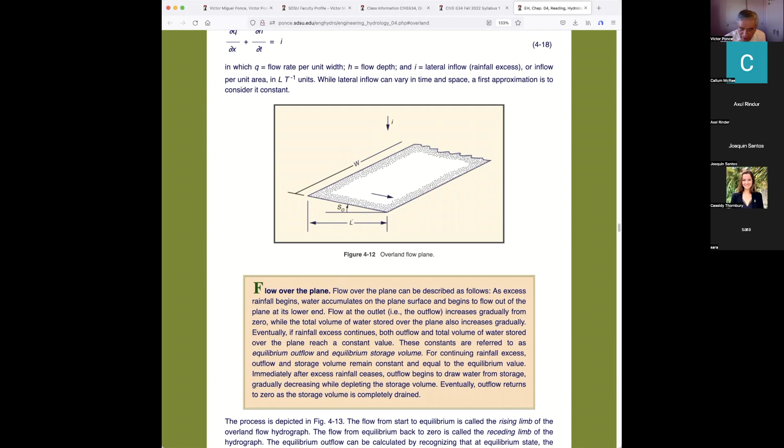Those of you that have taken computational hydraulics with me last year must know this subject already, hopefully very well. So flow over the plane, we have this characteristic which is very depictive of what's going on. We have the rainfall excess, and the response of the basin is a hydrograph because it starts from the beginning to respond. It doesn't wait until all the water gets through. When all the water is getting through the basin, it already reaches a peak over here. And then when the rainfall stops, then it starts receding.

So this is the volume of rainfall, and this is the volume of runoff or response. And as you can see, there's a phase toward the right because there has to be some time for the water to get from the furthest, most remote part of the watershed to the mouth.

There's different types of calculations for overland flow. The ones that are now being done have to do with numerical analysis. And this is part of the details of the HMS model, which I'm sure many of you have already heard of, if not already used. The Army Corps of Engineers HMS, Hydrologic Modeling System model, put out in the year 1998. So it's been 24 years since that model has been out.

That model was a successor to the HEC-1 model, which appeared in 1968. So 68 to 98, HEC-1, 98 to 2022, the HMS model. That's the standard for hydrologic calculations in the United States, and why not say it throughout the world? The Army Corps of Engineers models are used throughout the world. So for us to use these models, and we often have a chance to do that, we have to know something about overland flow, right? Otherwise, we would be blind.

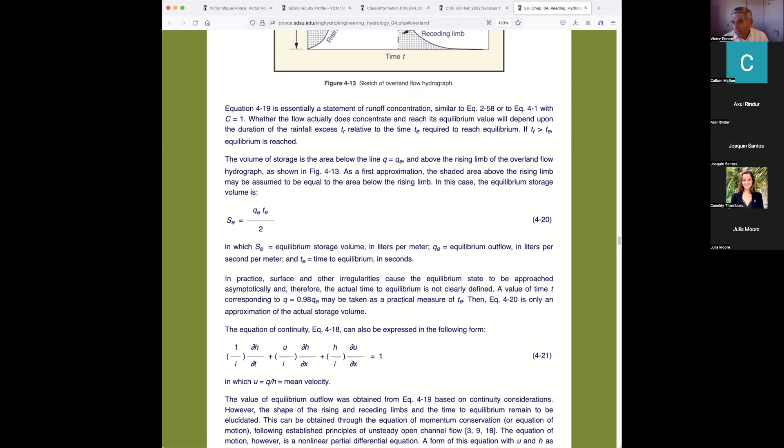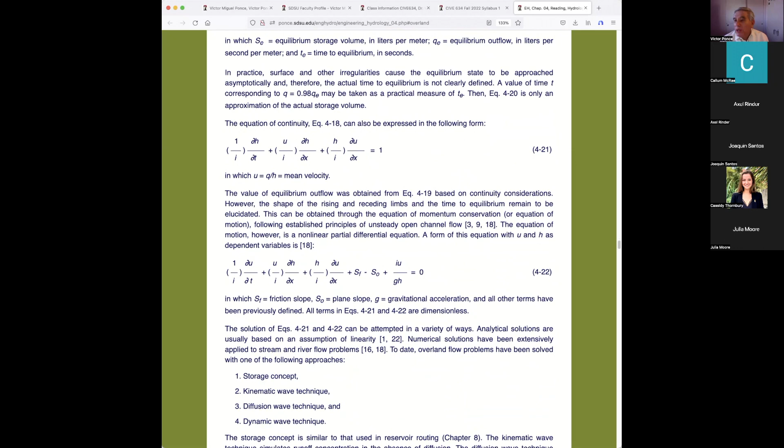So this is what I'm going to be talking about here today in the last 15 minutes, because that's all we've got. We've got the equations, equation of continuity and equation of motion. There's 3 ways or 4 ways to calculate the overland flow. The storage concept, which was pioneered by Horton in the 1930s, and then the kinematic, diffusion, and dynamic technique. The storage concept, I said Horton, 1935.

Kinematic wave technique, that was the technique that the gentleman in Australia, Wooding, as well as Woolhiser and Shockey of Princeton were using around the 1960s. At about the same time, at the end of the 1960s, Chow out of Illinois had one of his students do a PhD on dynamic wave technique. They actually did it. It's amazing, the dynamic wave technique.

And the reason will be apparent later on as I get into more detail as to why I'm a little bit chuckling here, saying they actually did the dynamic wave technique. They kind of jumped over from kinematic to dynamic without going to diffusion because they obviously didn't know. Then in 1986, I came out and did the diffusion wave technique for overland flow.

And then, of course, later on, everybody decided, and this is a story that I should tell, and I will eventually, of how the dynamic wave technique is unnecessary, totally unnecessary for overland flow. I'll get there. So diffusion wave technique turns out to be the best. And it's only circumstantial that your professor was the one at the center of developing the diffusion wave technique.

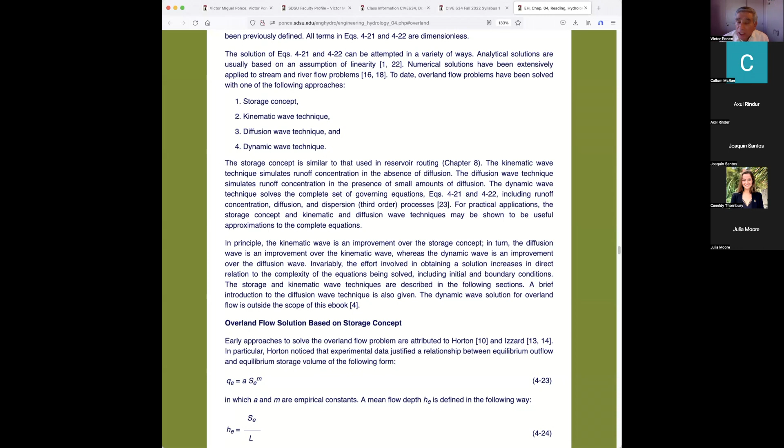I don't have the time in this course to look at all the details of how this happened, the advancement of numerical analysis and progress in that field, as well as the need to go beyond the kinematic wave technique into the diffusion wave technique. But first is, historically speaking, the storage concept. And the storage concept is due to Horton, like I said, in the 30s.

And this system, it's nice, and we did a paper in 1997, but it's kind of old. I think we should study it because it's part of history, and also it helps us to understand the process. But when it comes down to doing the calculation, the only thing we could do is use HMS, or use some other alternative model from other federal agencies, US agencies, or else European agencies. The Europeans have a model that they call SHE, like a woman.

But it's not called SHE because of a woman, but because SHE, for the French words Système Hydrologique Européen. I don't know French, so I can't pronounce it. But as the letters of the acronym stand for System Hydrologic European, the SHE model has been in the process of development and improvement for at least 30 years.

I can tell you stories about the SHE model, but I'm not going to do it at this point. We'll have to wait until later on if we have time.

So we have the time of concentration, and you would recall that I have already talked about time of concentration, and we have a formula here that came out from overland flow theory, which is very similar to the ones that have been developed by, for instance, Papadakis and Kazan. Papadakis and Kazan knew the theory, but they were not about to get into the theory. What they did was they collected a whole lot of data, then they correlated the data, and they came up with a formula that looks pretty much like this, in which they empirically define the value of M, which is the exponent of the discharge area rating.

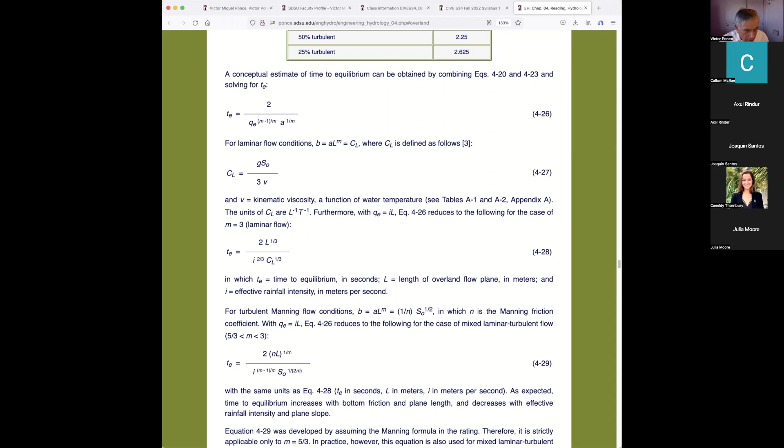And what about if it's in the middle? Most of the calculations, according to Horton, in the field were coming out with values of M equal 2. So that's how we represent the roughness or the regime of the surface flow. So as you can see, all this stuff is kind of in tune with what we have already said.

Another thing is what friction to use in overland flow, and the answer is we need to use a number which we call capital N that resembles Manning's n, but it is not Manning's n because it considers flow that is not turbulent but rather laminar, or rather in between turbulent and laminar. So for that purpose, we artificially jack up or increase lowercase n to be uppercase N, and as you can see, these numbers go all the way to 0.8.

And I did talk about this. We have some experience with this. One day I was in Florida with engineers from the Florida Water Management District, and they said they were using a Manning's n, or this capital N, of 1. And I said, boy, really, that's beyond my book. And they stood by their numbers. They said that's what it was. And I believe them because I had not done the calculation. I had no way of arguing with them on whether it was 0.8 or 1. It doesn't really matter because at that point, it could be either one or the other.

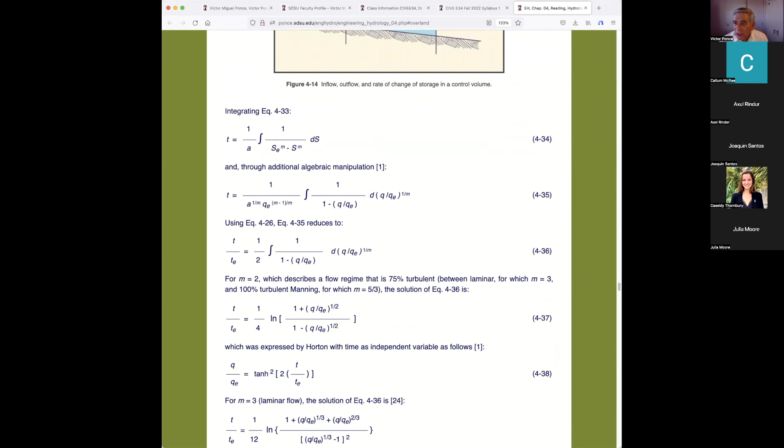So we have in here the integration that was done both by Horton as well as by Izzard. Izzard was a gentleman that was working in the 1930s and 40s in drainage of airports. And he also analyzed the equations of motion and came up with these formulas, which are fairly complex. And I'll come back later on to show this again in a more consistent fashion.

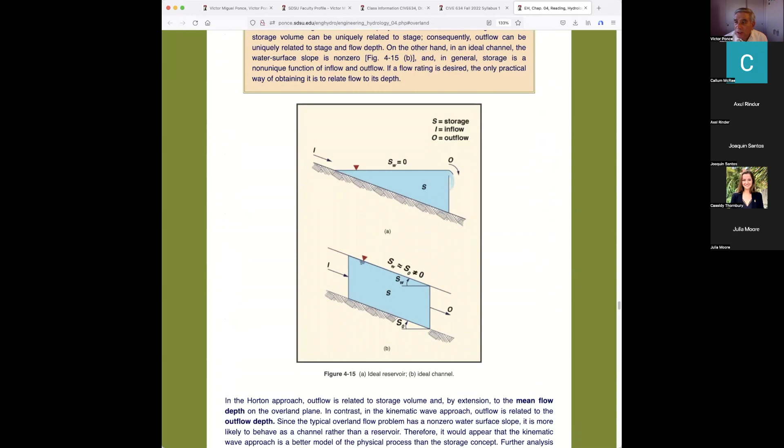So we have overland flow based on kinematic wave theory, which was started by Woolhiser and Wooding, as I already said. We also have a kinematic wave solution over here, which is basically the work that, again, Wooding and Woolhiser did, as well as Shockey too. All these three gentlemen did their work at about the same time in the middle 60s. Their publications make that clear. They were working at about the same time.

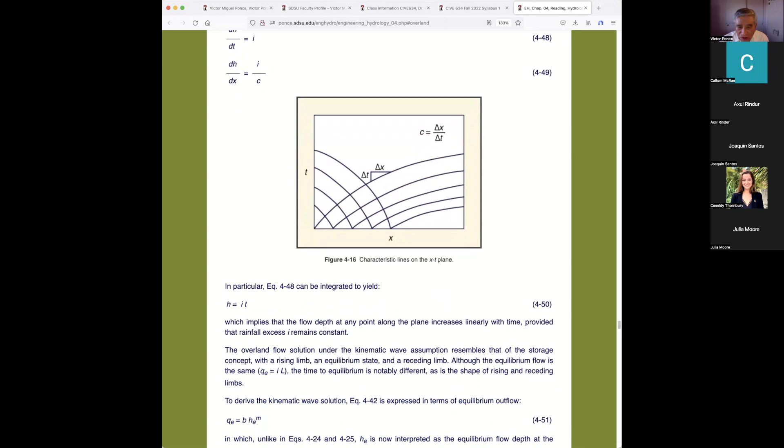I can't really tell you who was the first one to publish. It doesn't matter because if one of them preceded the others, it would have been like a month or two, and that is too small to even consider. Those three people were advancing these ideas in the mid-60s in various U.S. academic institutions, as well as in Australia.

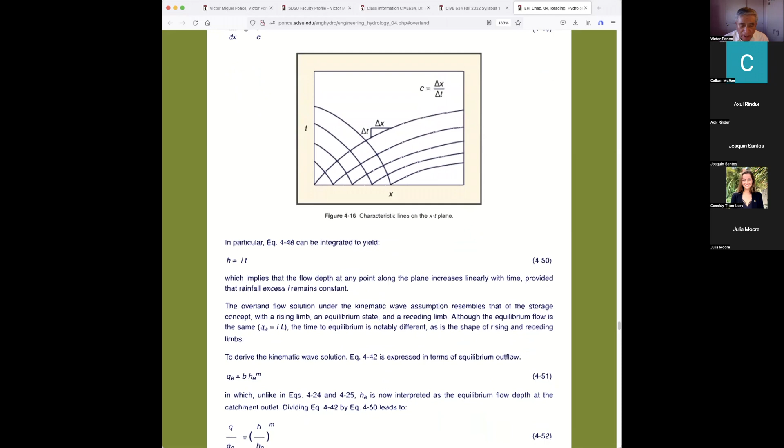And then Wooding's open book, right? That is still used. And there is an issue of whether this is realistic. I'm laughing because I've just read the paper by Woolhiser, and that's one of the questions that he poses. Is the open book realistic or not? And we have a story on that. I'll get back to refer to that story later on.

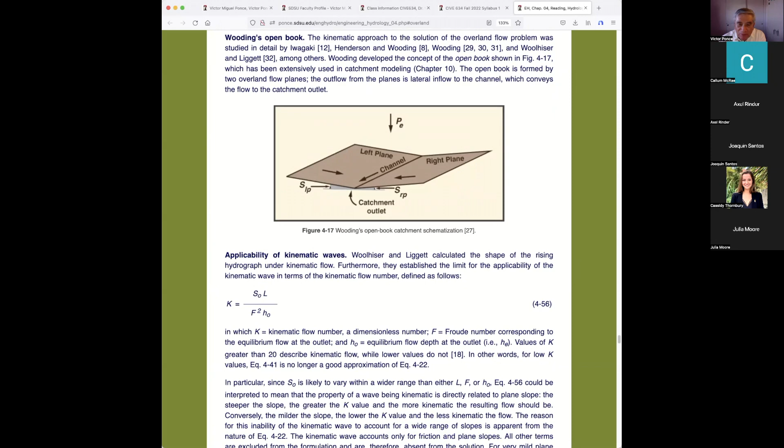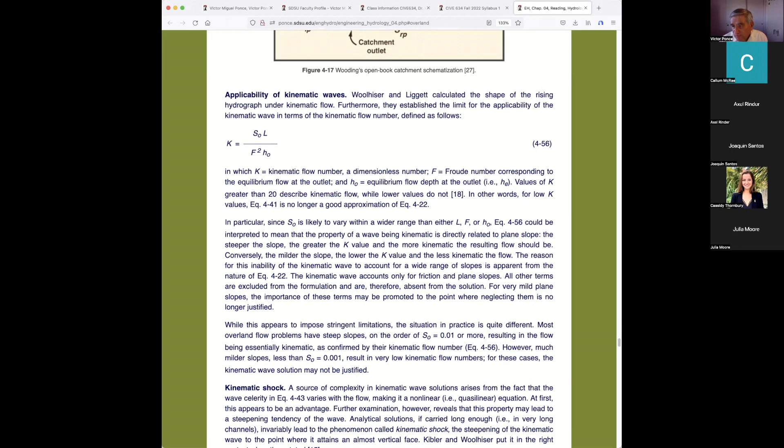Applicability of kinematic waves. The issue of, are kinematic waves good for this calculation? And the answer is, well, Woolhiser had the same question, and he developed the kinematic flow number, which he said should be used to test the applicability of any wave, because the wave size determines whether the flow is going to be kinematic. Later on, though, we found out, through the study that I call the S-curve 1977, that it was not the length of the wave, but rather the relative length of the wave in reference to the amount of friction, which was an L sub O, by the way. And those of you that have studied my S-curve would relate to what I just said.

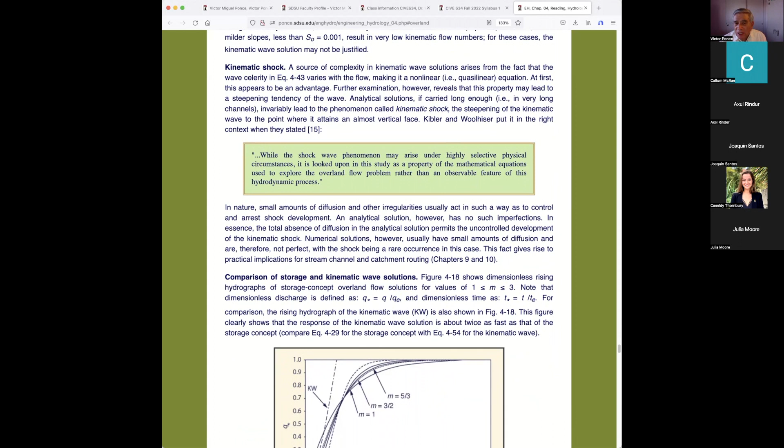Okay, so the kinematic shock is another story. The kinematic wave has a tendency to steepen because of the properties of the equations. They are nonlinear, and therefore the kinematic shock is there. This is a situation which caused a lot of thinking for Woolhiser and many of the other people that were working with him at the time. So why do they steepen? They steepen because they're nonlinear. Why does the kinematic shock appear so much in the numerical model and not so much in the real world? That's a very good question. It would take 30 minutes for me to explain why.

But let me just say at this point, because the open book was a simplification, it had no diffusion, because diffusion means complexity. Irregularities lead to diffusion. So if you have a plane that is very regular, then you can develop very easily the kinematic shock in that plane. While if there's irregularities in the real world, the kinematic shock is not going to develop. Does the kinematic shock develop? Yes, it does. And it leads to the so-called killer wave in reality. But that's another story that we will talk about later on. Comparison of storage and kinematic wave solutions. I'm going to get there today with the Hassanin paper, so let me just skip that.

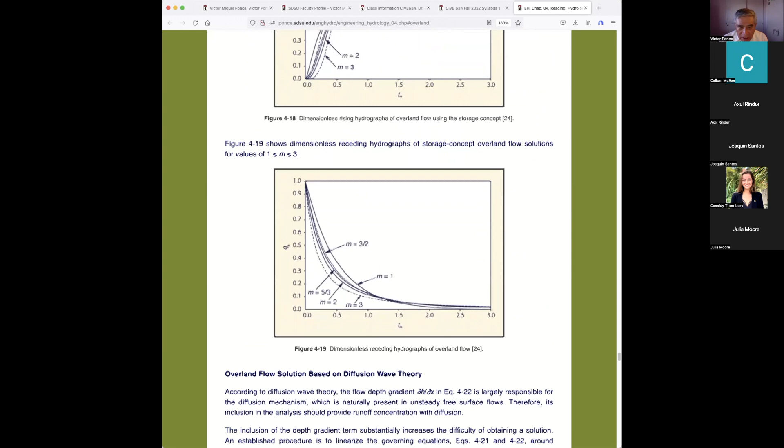Diffusion wave theory is what we developed in the year 1986. We decided that the kinematic wave theory was not quite correct. Even though Woolhiser was my professor, he had an office right next to mine at Colorado State back in the early and mid 70s. And I had chatted a whole lot over coffee with Dave Woolhiser. He was a proponent of the kinematic wave, but he was a very honest man. He said that it was imperfect. So we decided to come up with a diffusion wave, and ours is better. I'm not going to say it's perfect because nothing's perfect, but ours is better than the kinematic wave. And there are also very many stories related to the improvement of the kinematic wave by the diffusion wave. I'll get back to that later on.

Okay, so I finish here at this point, and I'm going to go to this paper by Ponce, Cordero Braña, and Hassanin. Cordero Braña was a mathematician, and I ran into a snag because I'm an engineer. I've done extensive mathematics, and I can do it. But if I can ask a mathematician to do it for me, it's better. So I asked Professor Cordero Braña to do the math. And that was well done. And then I had Summer Hassanin as a student at the time, 1997. I'm not sure if it's Sumner or Summer. Honestly, it's been 25 years, right? Summer Hassanin wrote this paper.

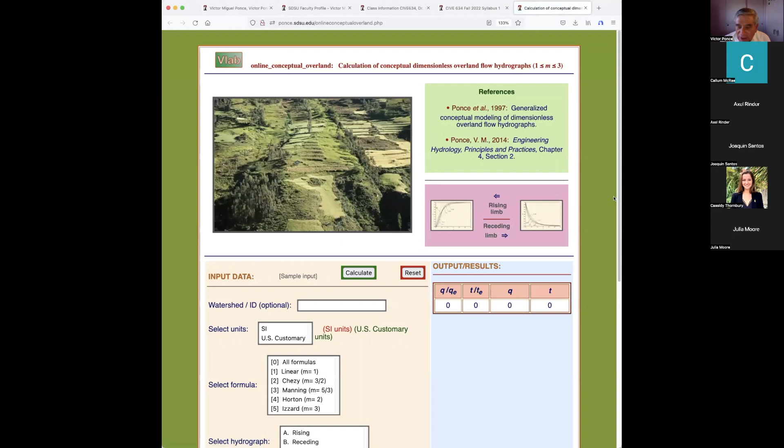So at this point, what I'm going to do is I am going to get into the calculator, because we have a calculator for just about anything. Anything that can be calculated within reason, we have a calculator. So we have a calculator of the conceptual dimensionless overland flow hydrographs. This is our calculator. Okay, I didn't put any data in here because I'm going to wing it so as to show you the results. I should tell you at this point that we have all the formulas: linear, Chezy, Manning, Horton, and Izzard.

And over here, linear is m equal 1, Chezy 3/2, Manning 5/3, Horton 2, and Izzard 3. What's m? M is the rating exponent. Remember I said earlier that Horton said that m was 2. It was not 5/3, but it was 2. So it led to the calculation by Horton, as well as us, of this rising limb. That's the rising limb of the overland flow hydrograph. And this one's the receding limb, okay? So we're going to come over here, and then we're going to do this calculation.

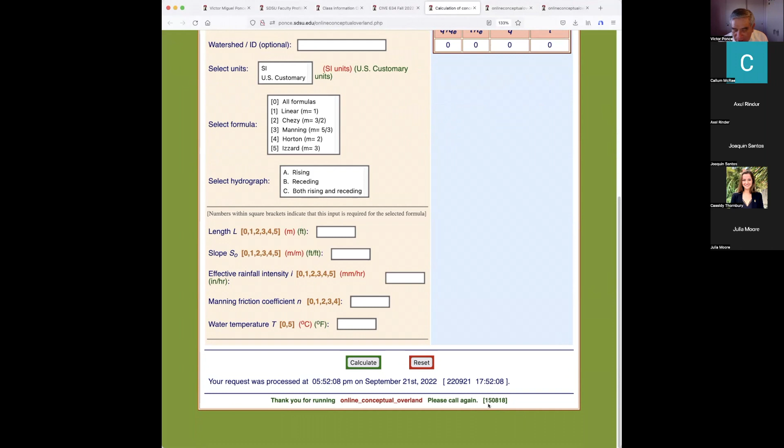I should tell you at this point, for your information, that we've had this calculator for maybe 5 years. No, 7 years. It was in the year 15 that we developed this calculator. I had a student, I don't remember her name right now, working with us. She got a degree with us in the year 2016. So in 15, we did this calculator. August 18, we published this calculator.

It's a great calculator. Now, the thing about this is that prior to doing this calculator, I would ask the grad students, namely people like you, to do the calculation by hand. But when the calculator came about, I don't do that anymore. So you have been spared the calculation by hand of the hyperbolic tangents of the Horton equation. You know, that's kind of involved. But I used to do it though. When we started doing this 30 years ago, we had no qualms about asking the students to get into the hyperbolic tangent equations, which were a little bit sticky. But at any rate, now it's out of your hair.

We have the Watershed sample here, and select units US customary. We're going to use all formulas, both rising and receding. Say the length in feet, 200 feet, the slope 0.01. These are typical numbers. Effective rainfall in inches per hour, say 1 inch per hour. That's a lot of water, by the way. Manning's coefficient 0.04. The water temperature is usually 68 degrees, or let's say 70 degrees, rounding the number. And we do the calculation and we get all the hydrographs in here.

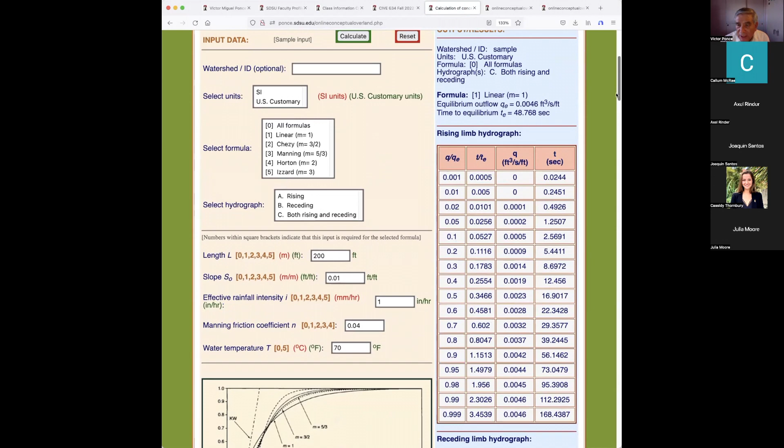Rising limb of formula linear, receding limb of linear, Chezy formula m equals 3/2, receding Chezy, Manning's formula, receding Manning, Horton formula, receding Horton, and finally Izzard formula, receding Izzard. So we got everything in here. All the formulas that I'm going to show you in a minute, where they were, how they were calculated. And as you can see, it took 1 second.

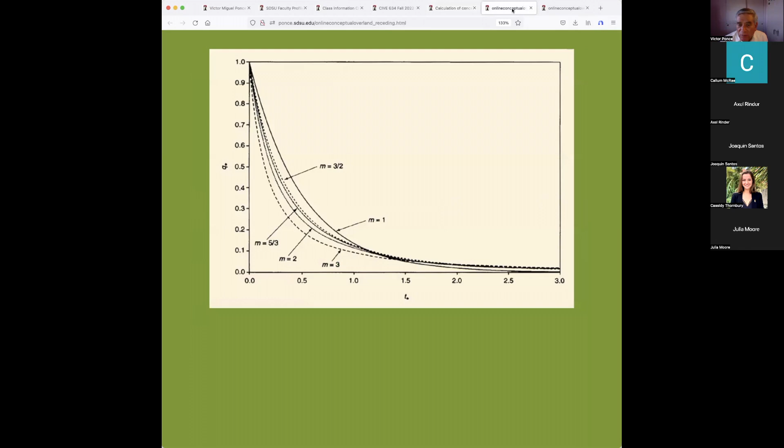We've got to realize that now we have the techniques, and we can no longer resort to the old techniques. Doing it by hand would be inappropriate at this point. You could do it if you wanted to, but I'm not going to ask you to do it. So that's the practice of this formula here. And now I'm going to go back, and I am going to show the paper by Cordero Braña and Hassening to show briefly the equations. I'm mostly interested in the equations.

This is generalized conceptual modeling. So it's generalized, yes, for everything. It applies everywhere. It's dimensionless. Once it is dimensionless, it is generalized. It can be used all over the world. This is mechanics. Technically, it is mechanics. Conceptual mechanics, but still mechanics. Remember, we talked about that already. So it's a deterministic method, and it has a little bit of conceptual in there because it has some conceptual components in the deterministic method. Okay?

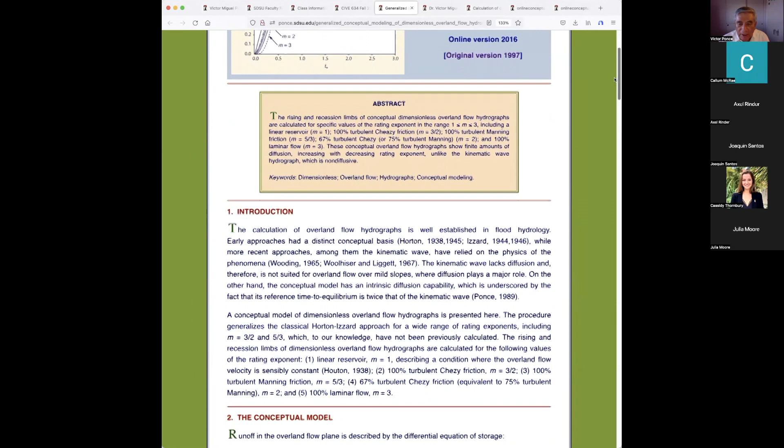And we decided to put in one graph all 5 formulas, which had not been done. Horton had done his formula, Izzard had done his formula, other people had done the other formulas, but nobody, to my knowledge, at the time, and we did this in the year 1997, original version, 1997, there it is. That's the original paper. So the original version, where am I? Here, yeah. That was it. So we did the calculation, we have the conceptual model. This is in a way repetition of what we had already done in the book in different ways. It looks very much the same actually.

The solution of the Horton equation, which is over here. And you can see for m equal 1, it's easy. For m equal 3/2, that is the Chezy formula. Then 5/3 gets really complicated. Then m equal 2, m equal 3, and so forth.

By the way, I should tell you that when we did this with Bhavya, her name was Bhavya Bhupalapati, she was a lady from India. She did this calculation and we tested and we did the model. The idea was to develop the computational model. And we had a bug in the original paper, and therefore we had to correct it.

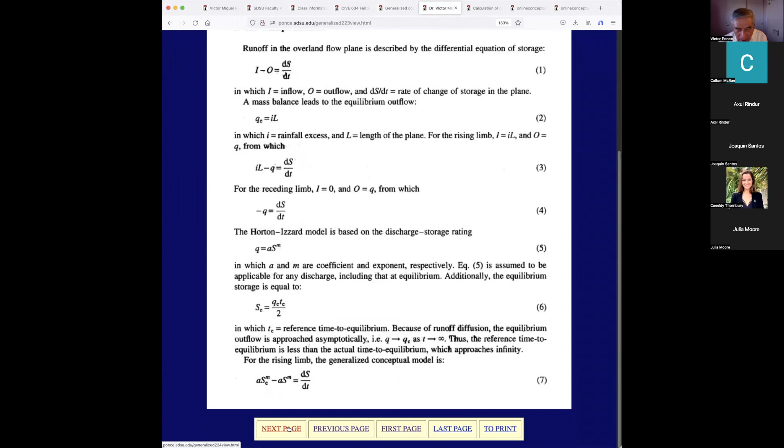And I do believe, let me check this. This is interesting that we should check this. Maybe it's not here. We'll see. No, I'm sorry to say that it's not here. I'm going to have to double check that and make sure. But we had to correct the original paper by adding an addendum because there was a bug. You know, so many equations. Anybody can make a mistake. So we made a mistake and we had to fix it. Okay, so let's go back in here. Yeah, I'm getting lost in here in my own work.

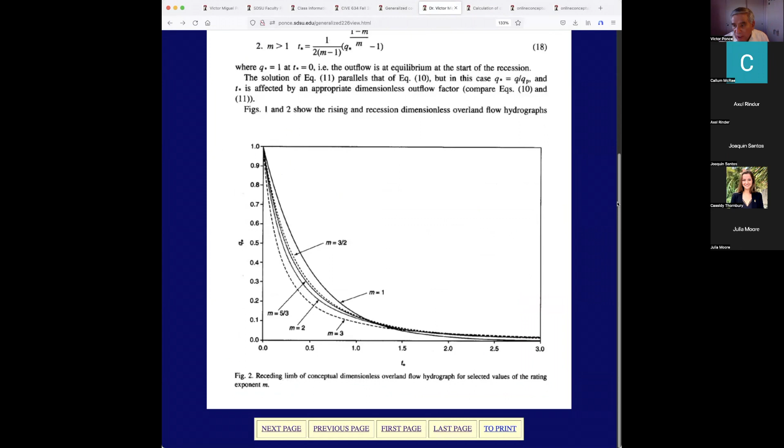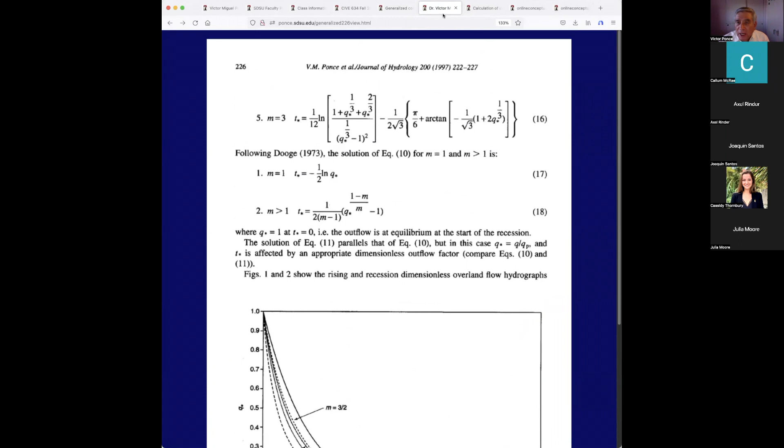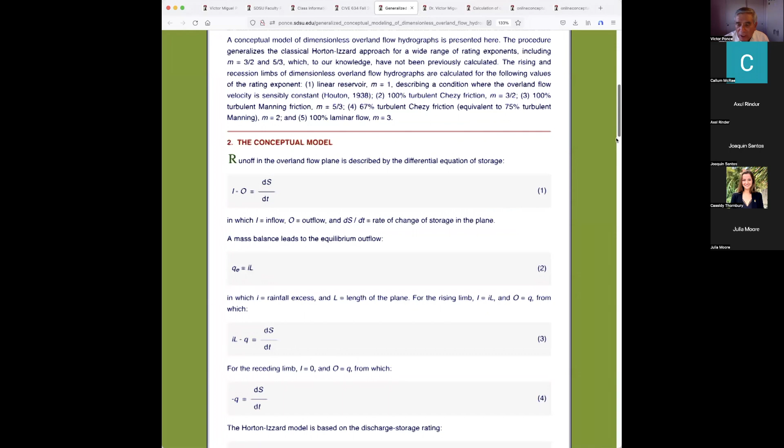Okay, so this is the end of that paper on the calculations for the 5 curves that were done by Hassanin and us. All 3 of us were working together on this. And so we published this paper and we really got a lot of credit for it. It's a nice piece of work. And then we subsequently put it on the web because we decided about 3 or 4 years ago that we were going to put everything on the web, on HTML. I love HTML. I think it's very, very powerful. Thanks to our friend Tim Berners-Lee, who in 1993 developed the protocol HTML that allowed him to talk to every computer in the world. And that led to what we now call the web.

So we decided to put these papers that were black and white on the web in color. And we did that over a period of 2 or 3 years. I had students involved in doing this kind of work. What we need to do is to scan the papers and then clean them up and make sure that there are no errors and so forth. But we did that, and we're in the process of doing all our papers on HTML now. We believe that the print version is passé, it's old, it's black and white anyway, it doesn't have any color.

So imagine who of you out there are watching black and white TV. Not really. Only if you're watching Ken Burns' video, it would be black and white, because at the time that Ken Burns is representing, the 20s and 30s, there was no color TV or color movies. Color movies came about in the 30s and 40s and were perhaps already established by the 50s, I think. I wouldn't know completely because I wasn't really active at that time.

But this is the paper that we reproduced in HTML format on the web. And we have patterns to do this, so we can do this kind of work readily. We have a format, and we follow our format, and we're fine. Okay, so that's as far as Cordero-Braña, and Hassanin. So now, the story of water does not flow uphill. I put this today on the web to give you a little bit of fun. So I'm going to show you this video. Can everybody see the video now?

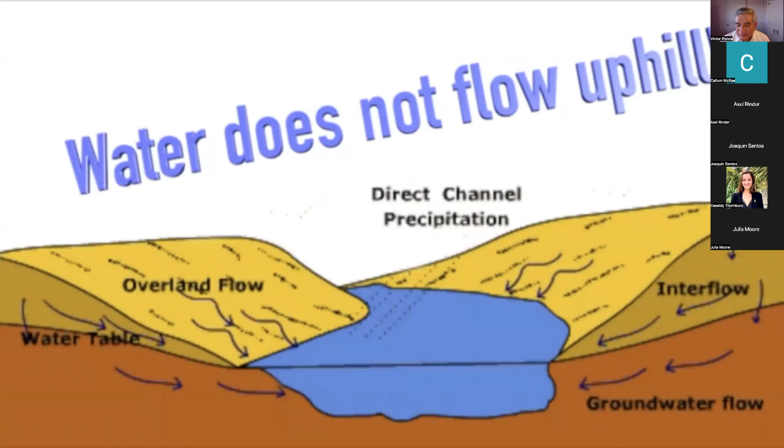1997, I wrote a paper which generalized the classical Horton-Izzard conceptual model of overland flow for rating exponents in the range 1 to 3.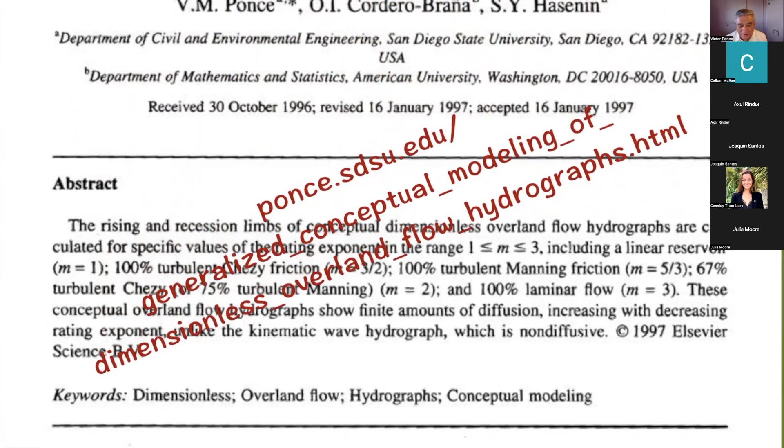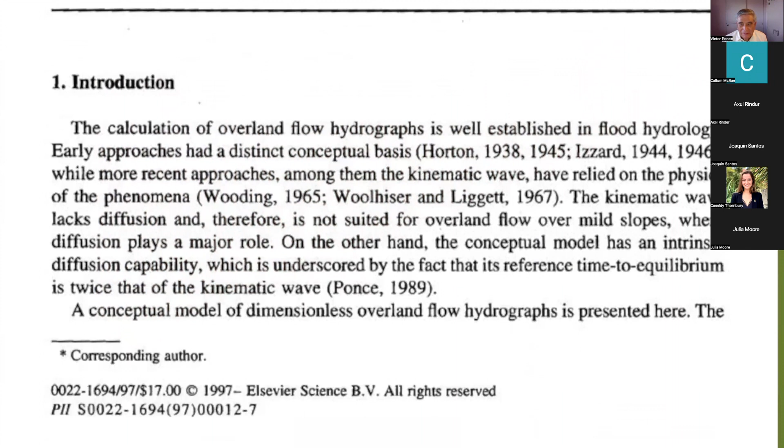The results were based on the integration of several complex mathematical functions. This figure here shows the most extensive experimental watershed that the U.S. has been able to put together in Arizona, the Walnut Gulch ARS. ARS stands for Agricultural Research Service. You know that already. Walnut Gulch Experimental Watershed near Tombstone, Arizona.

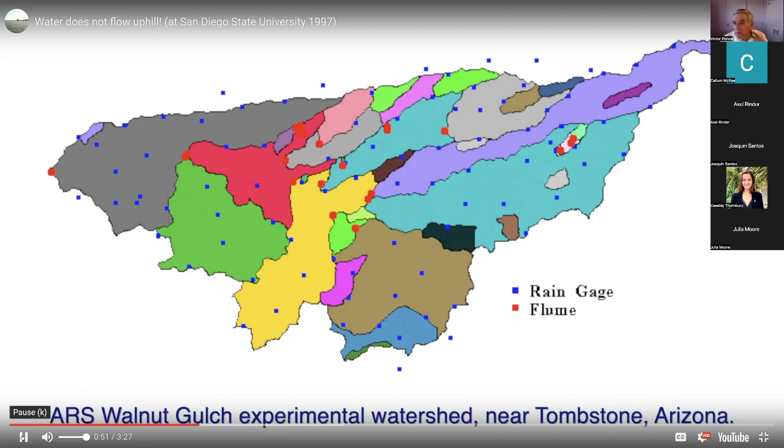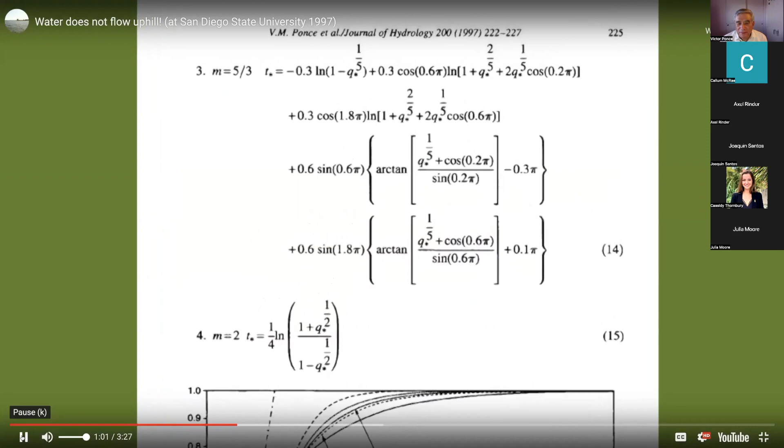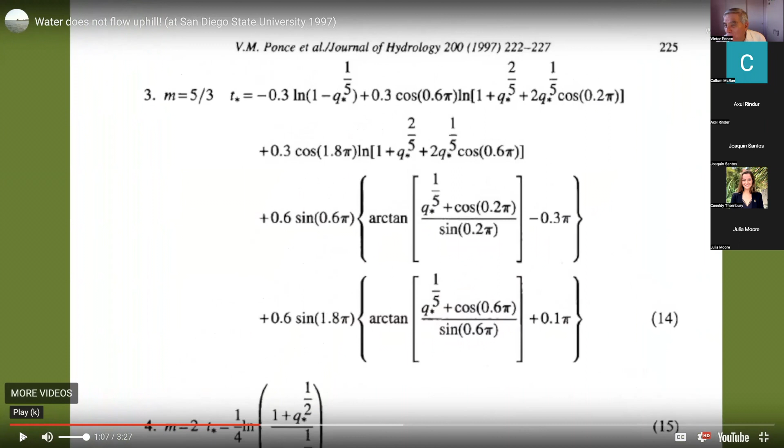But this is the experimental watershed, the most instrumented experimental watershed, I believe, in the world. Where, by the way, our friend Professor Woolhiser spent some of his professional time. By the way, I should mention to you, in case you have not figured this out, that all these equations, however terrible they look, are all already in the calculator. You don't have to do them again.

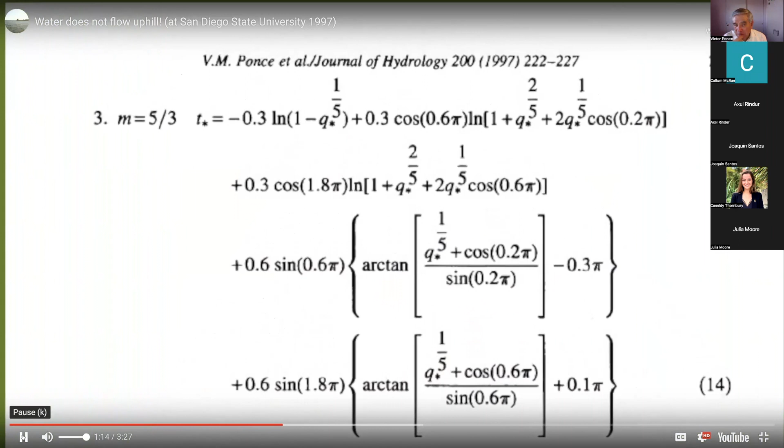Our first attempt was to use existing software, but we soon realized that something was wrong. The outflow hydrograph was not as expected. The water was actually flowing uphill.

While we're at it, I should mention something I had neglected before without really wanting. These are all diffusive hydrographs. Diffusion means they have some diffusion in there. All of them have some diffusion. Diffusion shows as spreading, as attenuation of the peaks. And therefore, all these 5 hydrographs can be considered diffusive hydrographs. Which one is the most diffusive? It appears that m equal 1, which is linear, starts very quick in here because it's linear, it's kind of odd, okay? Starts very quick, but then it becomes the most diffusive. And the least diffusive would be m equal 3, which is the Izzard formula.

By the way, now I recall talking about Mr. Izzard. I actually met the old man maybe 30 years ago at a conference. None other than Izzard. He probably won't remember me, and he probably passed away later on. He was almost 90, 95 at the time. But he was the Izzard that developed this equation.

Okay, so in here we have 5 diffusion models. Let's not say waves. Diffusion models of the overland flow rising hydrograph. And over here we have a model that is not diffusive, and this is the kinematic wave. And the diffusion models, all of them, at about this place at 1, at T star, which is the dimensionless time, more or less approach 90%. We consider that is the time of equilibrium, if you could consider a certain time of equilibrium for these diffusion models.

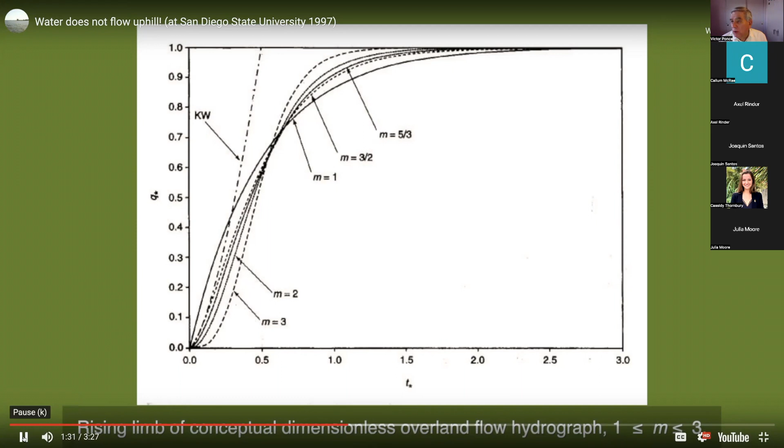I told my co-author, graduate student Sumner Hasenin, there is something wrong with this solution. Water does not flow uphill. I instructed her to start from basic principles, to integrate the functions by parts, and to develop the correct mathematical solution for this problem. 2 weeks later, Sumner came back with the answer to the puzzle. The software that we were using had an error. A minus sign had inadvertently been changed.

By the way, the software that we were using, this is true. There is nothing to say or to convince us that all software out there has no errors. Software always has some errors. So we have to be wary and careful about all the software that we use, as we learned the hard way in here. Well, let me repeat that. A minus sign had inadvertently been changed to a plus sign.

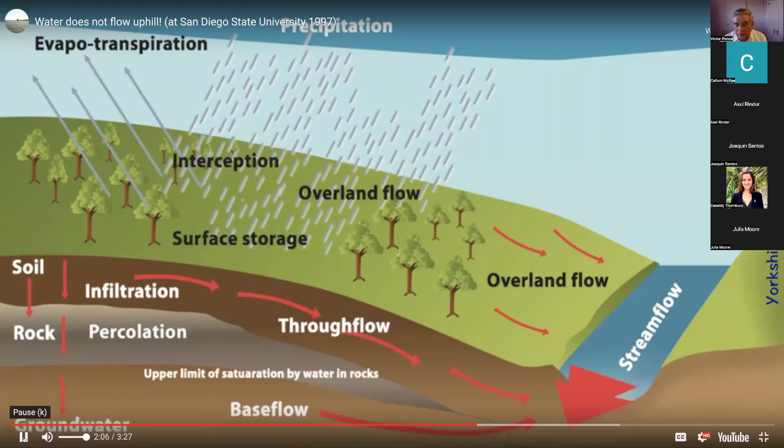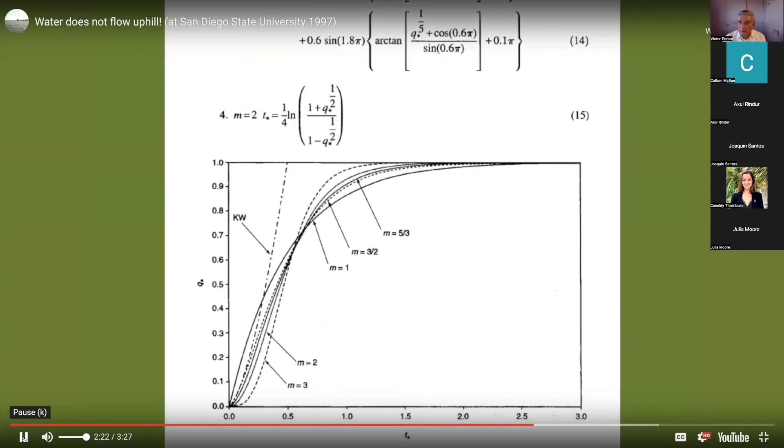Once we placed the minus sign where it belonged, the solution behaved as expected, correctly depicting the rising limb of typical overland flow hydrographs. Thus, the moral of the story: if you're solving a physical problem, it behooves you to have some knowledge of the physics. Otherwise, you will be unable to assess the accuracy of the calculated results. How was I going to take the original results that said that the water was moving uphill? No way. I knew the water was moving downhill. You see how it works?

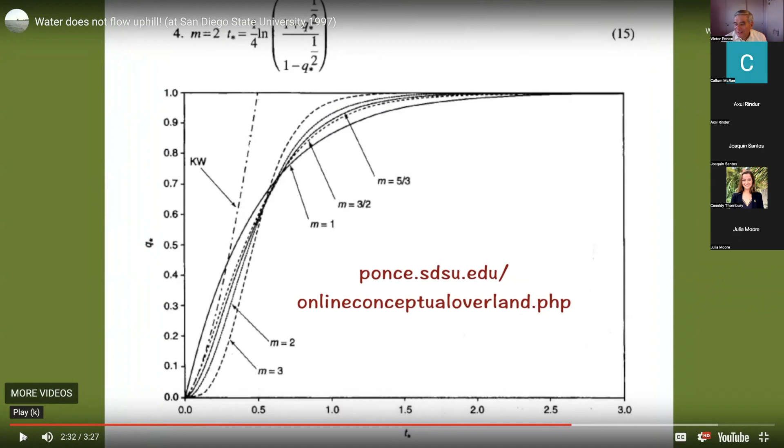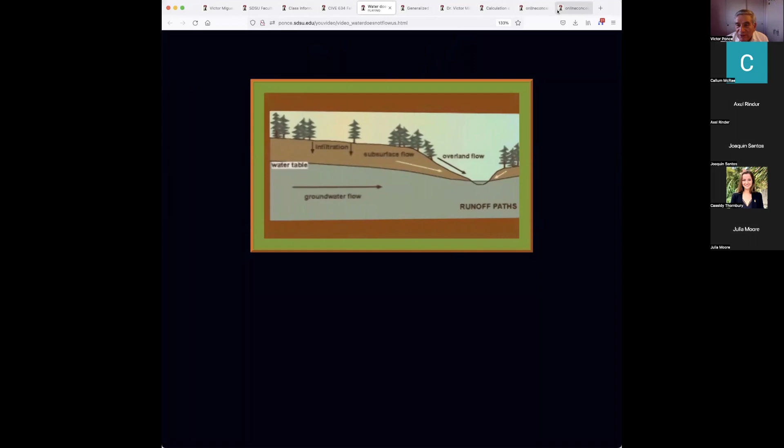Okay, where are we now here? There we go. Uh-oh, we messed up in here. We cut it all out. I'm sorry. I gotta go back now. I have to. I got confused over there. Bear with me a minute here. Oh boy. Surface water, syllabus. So we're done with water does not flow uphill. So now we're gonna go. Okay, what are you guys seeing now? We don't see anything. Let me go in here, I believe I'm over here now, right. Okay, good. What do you see now? A green page, right? Yes.

Okay. So, next in our reading is this paper, Parking Lot Storage Modeling Using Diffusion Waves, which I wrote in the year 1999 with Amy Klabunde. Now, Amy was a grad student in the department back in the late 1990s. And she came over to me and said, Professor Ponce, I want to do a thesis. I believe she did a thesis. I'm not sure. I think it was not a thesis. It was a special study. You know how we get special studies done with the students.

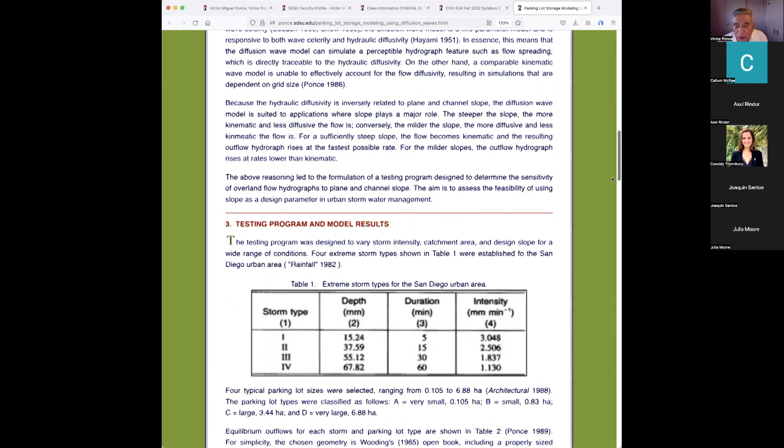But at any rate, with the formulas of Cunge, which were great formulas, of which we benefit a whole lot, we were able to put this model that was grid independent. And since this was grid independent, I was totally 100% behind it. And we came up with these. We varied the storm type, and we varied the equilibrium flows, and you have to get into detail. My point in here is not to overwhelm you with all the stuff, just to show you that this stuff could be done, and it is part of the hydrology of surface water.

So we came up with these calculations. We varied the storm type, storm type 1, parking lot A, parking lot B, parking lot C, parking lot D, and we varied the slope from 1%, 0.5%, 0.2%, and 0.1%. Why these slopes? Because we felt that 1% was kinematic, for sure. 1 and 2% are kinematic slopes. We know that for a fact.

0.5%, we have a lot of experience with this. And we know what's kinematic and what's diffusive. 0.5% is in the midst of it, in the middle. 0.2% maybe less, but 0.1% definitely somewhat diffusive. Because the capability for the flow to become diffusive depends on the slope. If the slope is mild, the diffusion creeps in, so to speak. So we used these 4 slopes, and we were able to come up with these calculations.

This one in particular, for instance, is very good, and I use this as a show-off. This one over here is the slope of 0.1% that did not reach the maximum. It stopped there because the rainfall stopped. And over here, 1% was kinematic. If it wasn't kinematic, it's very little diffusion. So this is little diffusion, a little more diffusion, and a lot of diffusion, which allowed the hydrograph to be subconcentrated. Remember the concept, subconcentrated? The hydrograph is subconcentrated already.

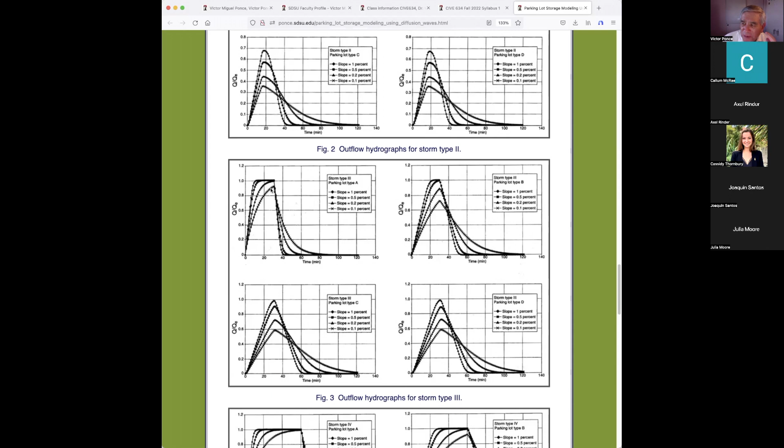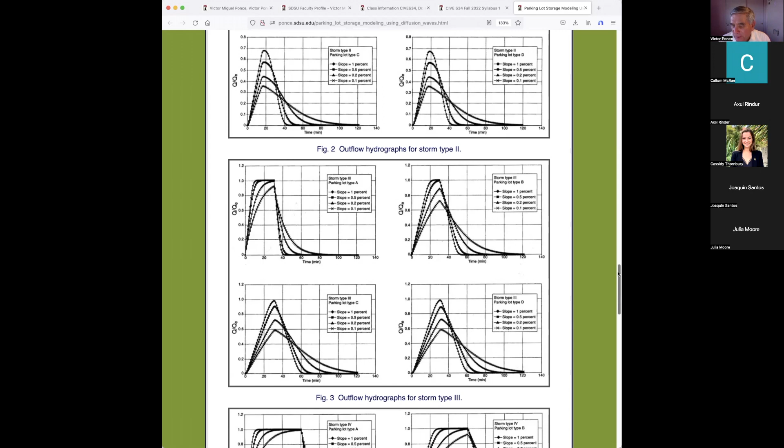The issue of whether subconcentrated flow exists or not was settled by Sherman in the year 1932. He said, I cannot use the rational method because it gives me answers that are too large. I need to use something more in tune with the mildness of the watershed, because he was using large watersheds on the order of 2,000 to 5,000 square miles. And so he developed the unit hydrograph, which we will cover later in more detail. Standard method in watershed analysis.

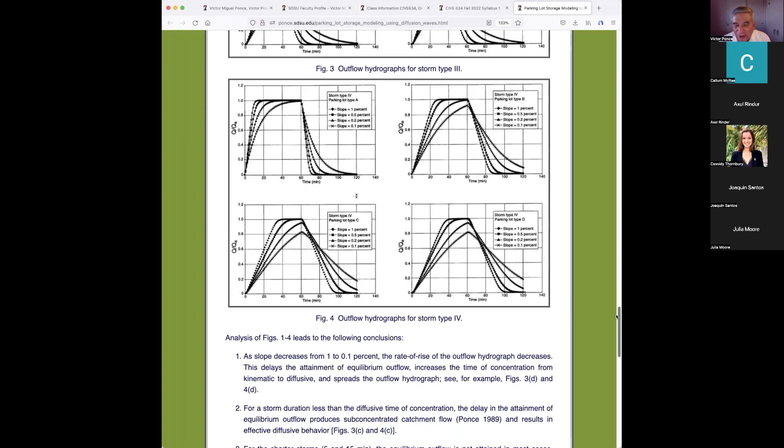So these charts demonstrate beyond doubt, period, that you can indeed calculate diffusion waves within a numerical context and apply them to watersheds. So with that, we finish that paper, and now we come to the Woolhiser paper. And this is a fascinating paper. I reread it this morning. I reread this paper every time I teach this class. So I must have read this paper maybe 10 times, completely.

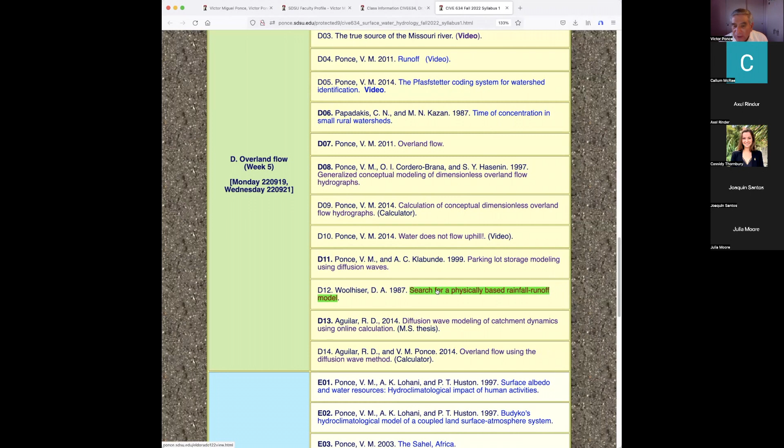It's full of detail. Who is Woolhiser? Well, let's take a look at what he says. Let me see if I can get a little bit bigger in here. "I'm greatly honored to be named the Hunter Rouse Lecturer for 1994 and to join the highly distinguished group of previous recipients." So Woolhiser was the Hunter Rouse lecturer in 1994. The people in the other class, 638, would recall that we talked about J.F. Kennedy being the Hunter Rouse lecturer, I believe, for 1983. So our group is not unfamiliar with the Hunter Rouse lecture.

So the Hunter Rouse lecture is an ASCE prize given to very important people who have a strong record of accomplishment in their respective fields. Kennedy was a hydraulician. This guy is also in hydraulics, by the way. It's hard to define. When you talk about routing, you cannot say I'm a hydraulic engineer or hydrologic engineer, because routing is in the middle of both. It's like me. Professor Ponce, are you a hydraulic engineer? And I say, well, depends on how you define it. I actually do both. Why? Because I'm sitting in the middle, which is routing. Okay?

Woolhiser claims he was never a student of Hunter Rouse. In the late 70s, Hunter Rouse spent the summers in Fort Collins where he taught a graduate course. I actually missed that course because he started teaching in 1977. And in 1977, I was already a doctor and I was already teaching over there at Colorado State. So I didn't go to Hunter Rouse's class. I am told by friends of mine that it was fun and it was good and so forth, very instructive.

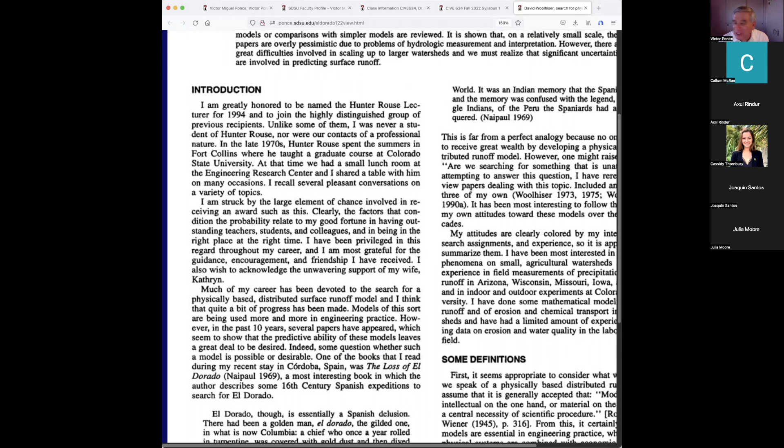I am struck by the large element of chance involved in receiving an award such as this. Clearly, the factors that condition the probability relate to my good fortune. So Woolhiser is also talking about his good fortune in having outstanding teachers, students, and colleagues, and being in the right place at the right time. That is very important. Otherwise, it cannot be done. Okay? Much of my career.

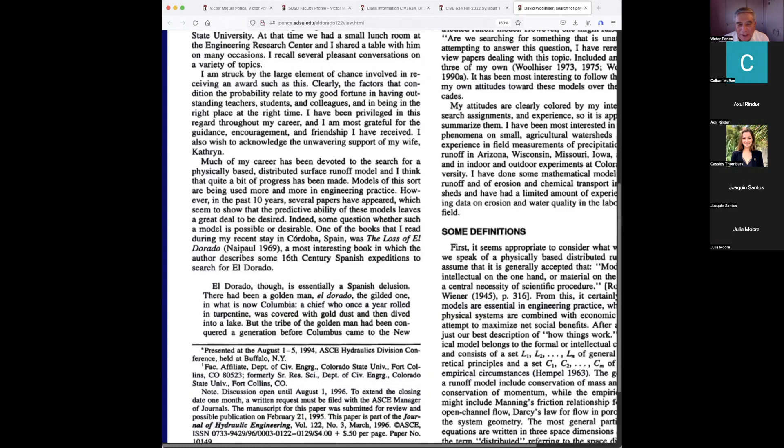Now, this gentleman is going to do a history of his own career and get into much detail later on. We will skip the details. I'm interested in the history and the reason why he wrote this paper. That's more important for us. Because don't forget, this guy worked on this subject for 40 years. And then after 40 years, he had done so much work and it was high reputation that he was asked to comment on it. And he did. And he did it very candidly, by the way.

I should tell you at this point, interestingly, that Professor Ponce is always at the right time at the right place. And I was in Spain at the time because I had been invited to give a lecture. And for one reason or other, I ended up going to Cordoba because my wife and I wanted to visit Cordoba. The Mezquita of Cordoba, everybody wanted to see. We happened to be at the University of Cordoba. And who do you think I ran into? Woolhiser. Unbeknownst to me, he was out there working.

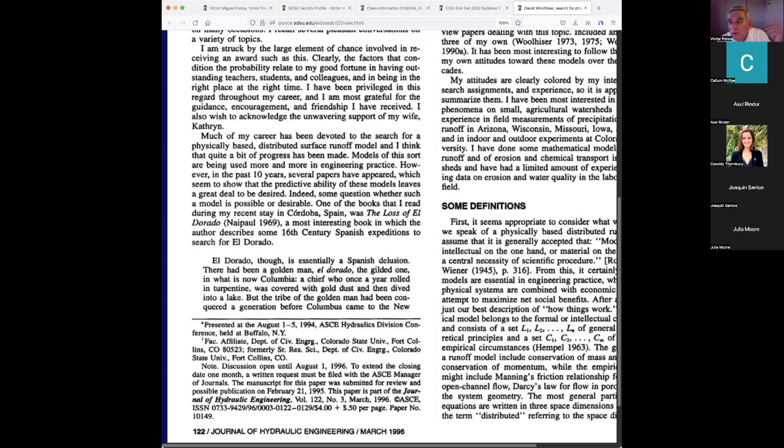And in this paper, he says that in 1994 he was in Cordoba. So I'm not lying. I actually met Woolhiser, whom I knew from my time at Colorado State. And he told me at the time that he was writing this paper. So this paper has a lot of emotion for me because I was actually talking to the author at the time.

Interestingly, though, when he was in Spain, he read about El Dorado, which was an issue that had to do with Latin America and South America. El Dorado, you may have heard of. It's a fable, a myth, or something like that. But he does say that clearly in here. One of the books that I read during my stay in Cordoba was The Loss of El Dorado, a most interesting book in which the author describes some 16th century Spanish expedition to search for El Dorado.

There's an ample stack of books on El Dorado. Nevertheless, this morning I went on Amazon and I bought this book. I wanted to see what Woolhiser at the time was referring to. I figured that Naipaul was from Trinidad. So he is one of the gentlemen originally of Indian extraction that came to Trinidad 100, 150 years ago when the British were out there in control. They brought all these people from India. So this gentleman wrote a book on the loss of El Dorado.

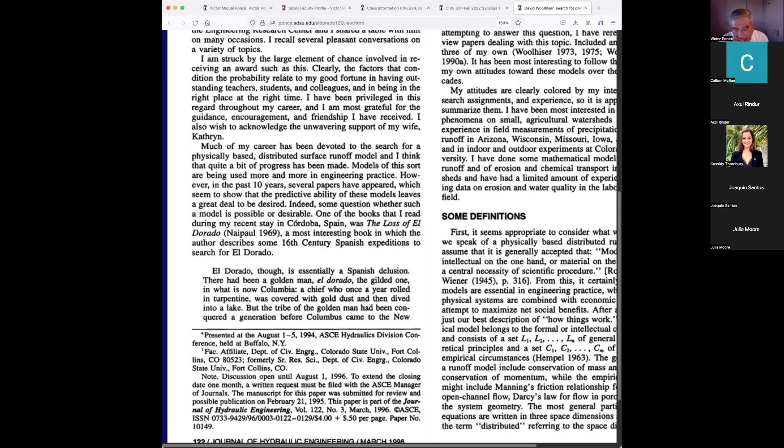El Dorado is essentially a Spanish delusion. There had been a golden man in what is now Colombia. Colombia with an O, by the way. People make that mistake. Colombia, the country. A chief who once a year rolled in turpentine was covered in gold, but the tribe of the golden man had been conquered a generation before Columbus came to the New World, and there was a lot of fighting everywhere, as it is today too, by the way. So it was an Indian memory that the Spanish pursued, and the memory was confused with legend.

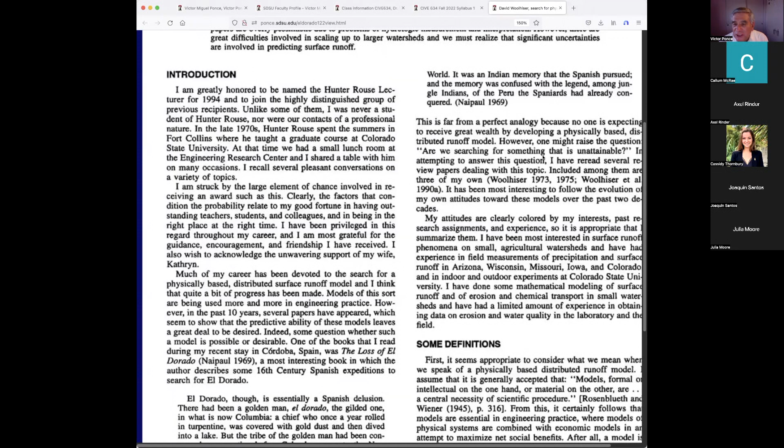Okay, so he says this is far from a perfect analogy. But why is Woolhiser bringing up the subject of this book that he read while he was in Spain? Because he wanted to make a case that perhaps the pursuit of the calculation of overland flow was a hydrologic El Dorado. And that's exactly what he calls his paper, a hydrologic El Dorado. You see where he's coming from? Are we searching for something that is unattainable?

So Professor Ponce spent an hour already telling you where all the equations are and how the calculators and everything that we have already done. And now I'm talking about what Woolhiser said in 1995. He says, is this attainable or unattainable? Can we do this or not?

And no person better than him to talk about this, because he had started his work at Cornell in the middle 60s. So he was 30 years into the practice when he was asked to write this paper. And he had worked those 30 years, and he talks about this in here. The entire 30 years he's working on this subject because he was a federal government employee and he had that choice. Federal government told him, you know, Dave, you're going to be working this for 10 years or 20 years.

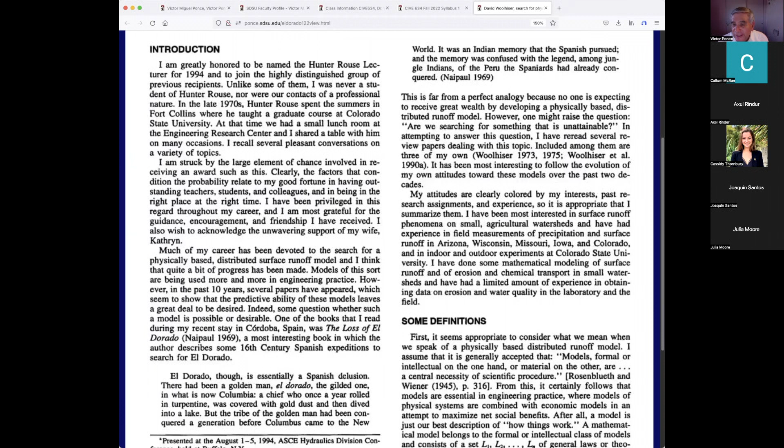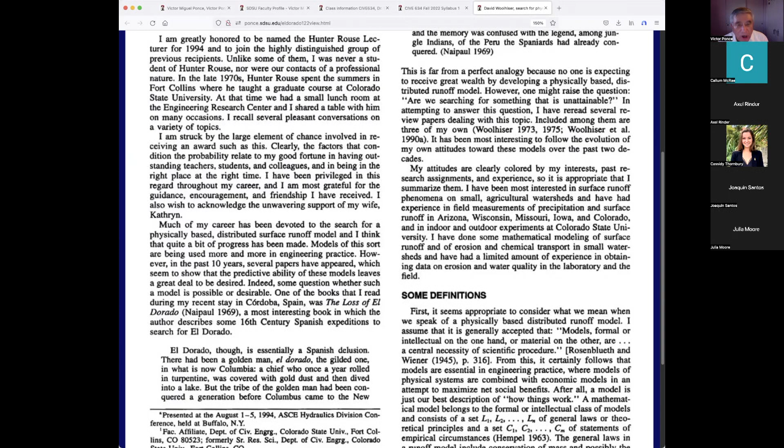He was with ARS, and these scientists stick to a topic and they don't move out of it. As a matter of fact, Woolhiser is a very good example of that. And he's talking about it very candidly. Okay, so he was working for 30 years. And he tells the story, and I will get into the story because I think it's fascinating. The story of how he started his work at Cornell with none other than Professor Liggett, who, by the way, was another one of the recipients, an earlier recipient, I believe, of the Hunter Rouse lecture.

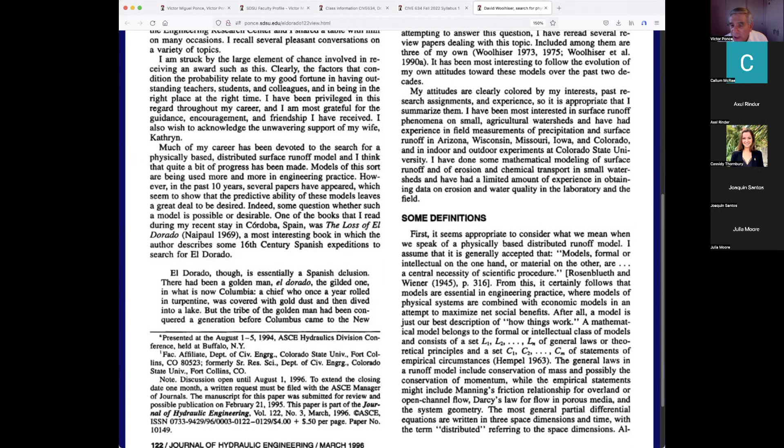Okay, he says, my attitudes are clearly colored by my interest, past research assignments, and experience. So it is appropriate that I summarize them. He was working in Arizona, Wisconsin, Missouri, Iowa, and Colorado. And finally, the last part of his career was spent at Colorado State as part of the ARS delegation working at the Engineering Research Center at Colorado.

So I interacted with Dave extensively over coffee while I was at Colorado, because we were working on the same floor for 3 years while I was a student there. And as well as when I was a professor, because I spent 3 years as a student at Colorado and then 4 years as a professor, because I moved from student to professor out there. And all the while I was visiting every once in a while with Dave Woolhiser.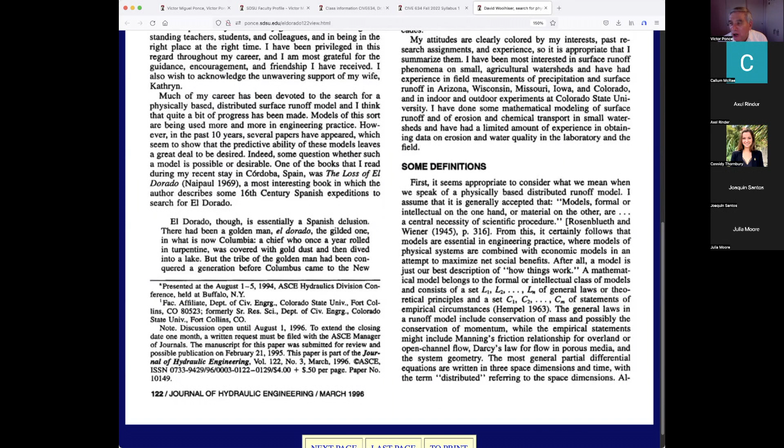Not so much with Roger Smith. And those of you that, yes, that's right. In this class, I talked about Roger Smith. Roger Smith was working with Woolhiser, was around there, but I didn't talk with Roger as much as I talked with Dave. When I did my S-curve, I had such friendship with Dave that I gave him my paper to read, and he read it and complimented me on it. I'm not exactly sure how much time he took on it, but he did compliment me on it because it was a good paper.

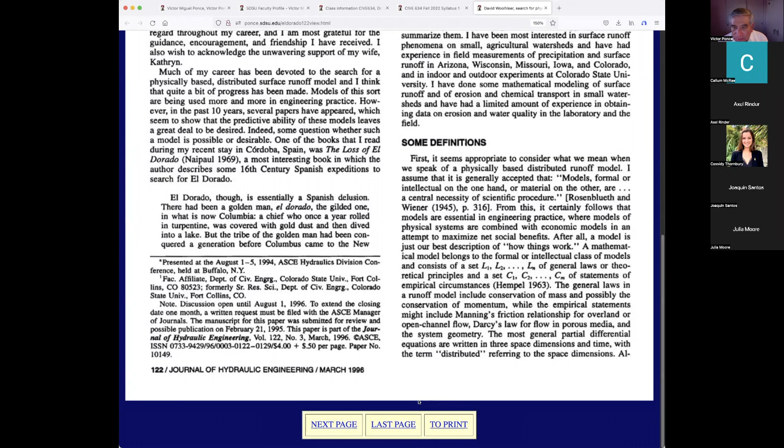So he goes into some definitions. He's very detailed because he shows the experience that he had. Very detailed on what he knows and what he doesn't know. He's very humble in telling you what he doesn't know. But this is the point that he's trying to make, and he makes it really well. He says, in order to do the modeling, we need to make some simplifications. Perforce, we have to. The open book is a simplification already. You don't see an open book out there, and yet we use it all the time.

So the question was how bad of a simplification it is, and the answer is, don't worry about it. It's a simplification. It's not perfect, but it's the only thing you could do. Given all things considered, it's the only thing we could do. Otherwise, it would be almost impossible to do. So he basically comes to the conclusion throughout the paper that he has to do it because that's just the only way we can do it, and that we must do it because we cannot cross our hands and say, no, we can't do it.

Let's go back to the way we did it 100 years ago when we didn't have any computers. Now we have the computers. So we cannot rely only on the rational method, which is 3 calculations.

The Aguilar calculation that I'm going to show you hopefully here in a few minutes probably has 30, 40 million calculations in 2 seconds. So we have the computers, we've got to use them. It's better. Now, what is my feeling on this whole thing? My feeling on this whole thing is that there's a what-if situation. You can use the model for what-if situations.

You can say, what if the rain doubles? What if the infiltration reduces? What if the change is here, this change, that change? We can run 15, 20 cases of what if in no time. Well, we could not do that with the older models. They did not have that capability to do what the numerical models can do when you pose the question of what if. So it's a better solution.

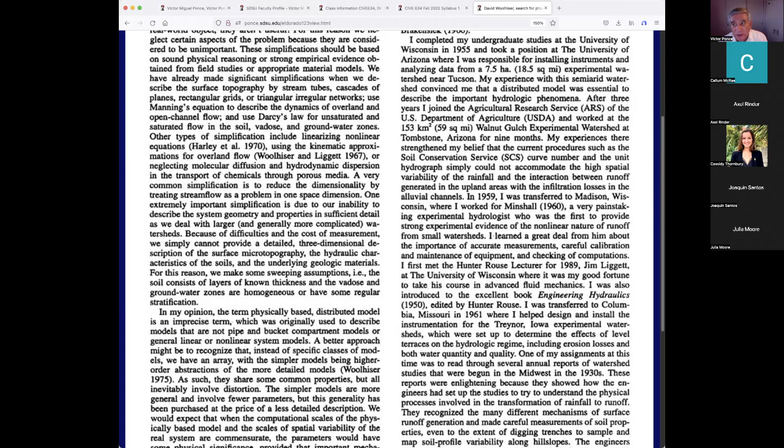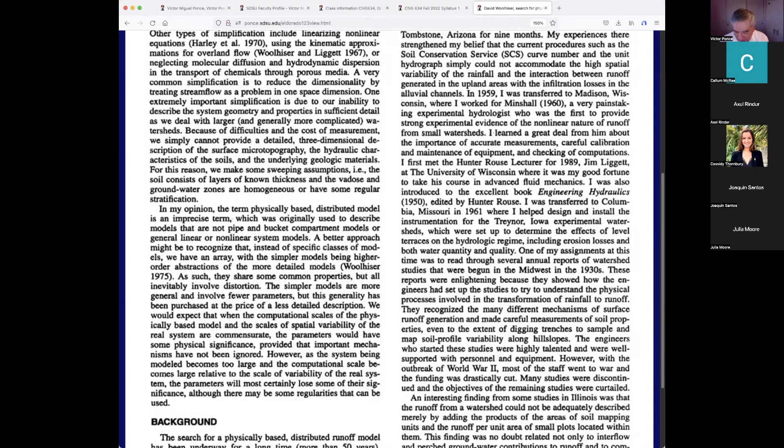Woolhiser said that, and none other better than him to say that, who had practiced 30 years in this field. I've also practiced in this field, but I've practiced in several other fields, like 5 or 10 fields. Woolhiser only practiced in this field for 30 years. So I'm going to say that he knows more detail about it than myself. So the background, and in here he's got a statement that is really amazing, that I very much relate to. He's talking about how he developed his expertise, okay? And that's not of much interest to us at this point.

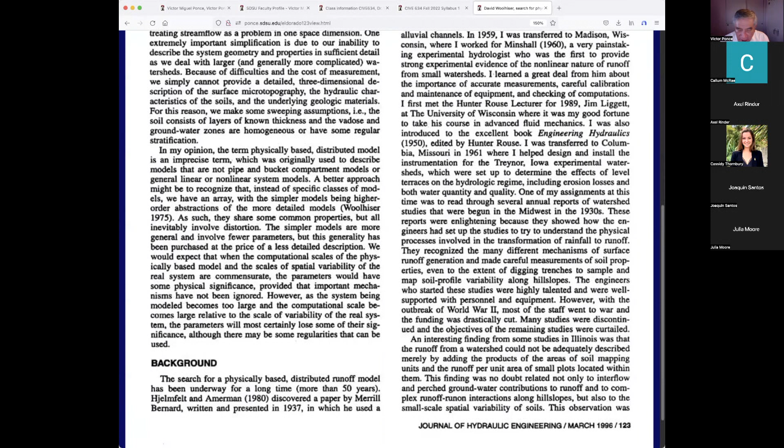Okay, here we go. Much of the research in the 60s dealt with the mathematical description of overland and open channel flow. And investigators usually started with one-dimensional Saint-Venant equations or a simplification such as the kinematic wave. One-dimensional. Why one-dimensional? Why didn't they go to two-dimensional? Because we couldn't do it.

We started using the computer in the 1960s. The first computer I used was in 1965 in Peru. And they had already been using the computer for 10 years here in the United States. But developing the computer doesn't mean applying it to hydrology. So it was gentlemen such as Schaake and Woolhiser and Wooding that applied this methodology with the digital computer for the first time in 1965. For the first time. What are they talking about?

The computers of the time had, I lived through that, by the way. I'm old enough to have lived through that. The first computer had 7K of memory. The computer that I used in my dissertation, which was in 1976, had 76K of memory, the largest computer in the world. Right now, your cell phone, which already is a computer, has 32 gigs. So we go from kilo to megs and to gigs. So that's 1 million more times storage as well as speed and everything else.

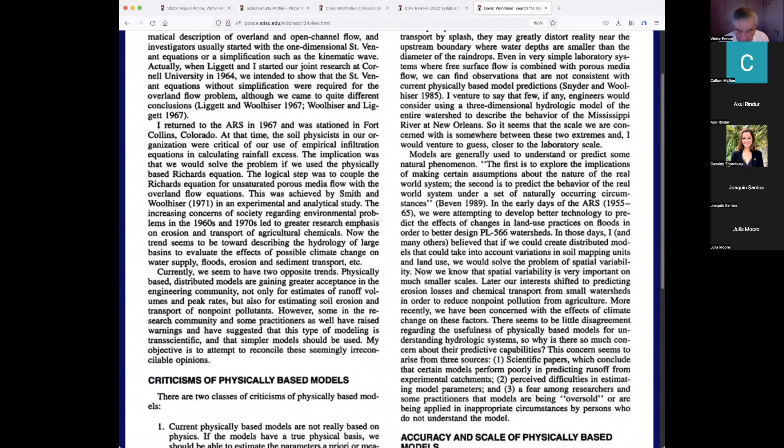That question needed to be answered, and it was answered by none other than Professor Ponce back in the year 1978 and 9. So it was done 13 years or 14 years after Woolhiser had his experience over at Cornell. We basically said that it was almost impossible to do the dynamic wave for various reasons, which I don't care to mention at this time. So that was the story, fascinating story. So he talks about the criticisms.

Like in the case of the curve number that I have talked about to you guys, there's always somebody doing the very fancy stuff and somebody trying to undermine and doing the simple stuff. And that's always like that, by the way. It happens everywhere, and this is not an exception. In here, Woolhiser is saying that there's people trying to do the very complex stuff and others that are trying to simplify it because they are claiming, right or wrong, that it is not good enough or that it is too much, too soon, too fast, right?

Beven, for instance, is a great gentleman, contributor in hydrology, originating in England. He's been writing papers for the last 50 years. I never met Beven, but I've known of his work. I think we corresponded once or twice over the last 50 years. Liggett says this in 1990, look at this. If there's an example of a computational hydraulics problem that has been defeated by the wealth of detail, it must be this one. We are nowhere near to describing the hydraulic properties of a watershed. That was good in 1990 and is good in 2022.

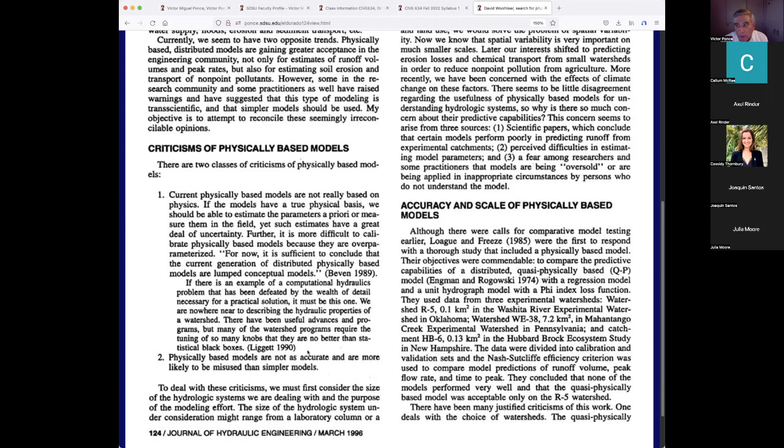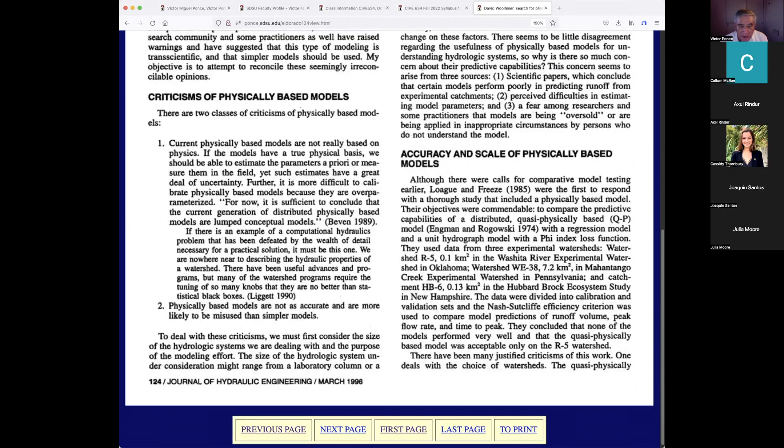There have been useful advances in programs, but many of the watershed programs require the tuning of so many knobs that they are no better than statistical black boxes. The statistical black boxes are the stochastic statistic methods, which have to be considered of less caliber than the deterministic methods. We should not confuse one with the other, and yet Liggett is saying here that they are readily confused, one taken for the other. That is not quite correct. Physically based models are not as accurate and are more likely to be misused as simpler models.

Okay, I'm going to tell you my take at this point. I read this paper and I'm not going to bore you. I urge you to read the whole paper because it's a good example of what has been done out there. Woolhiser told the story in very much detail. But my take on this whole thing is that there is room for simple models and there is room for complex models. And I do believe there's the user of simple models and the user of complex models. A user of simple models should not use a complex model because he or she wouldn't know how to do it. And a user of a complex model should not use the simple models because it would not be up to snuff, so to speak.

So there's two divisions out there. The researchers are apt to use the complex models. The practitioners will go more for the simpler models. There's going to be somewhere in the middle an advanced practitioner or a researcher that wants to come down to earth. There's always a transition in the middle. And I do believe that myself, I've tried to be in the transition, although sometimes my tendency is to get very sophisticated, as you probably have already figured out. So that's my take, and I think Woolhiser didn't say it quite, that there are two types of users. You cannot bundle all users into one category because that would not be correct.

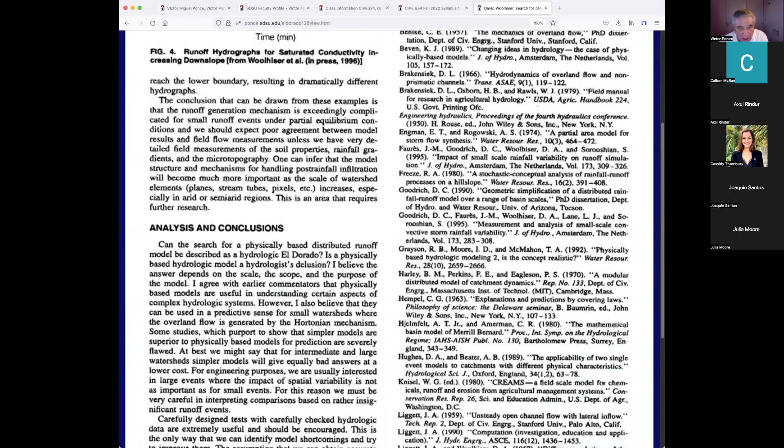So finally, I'm going to go to the previous page, over here. So analysis. Can the search of a physically based distributed model be described as El Dorado? I believe the answer depends on the scale, the scope, and the purpose. So he kind of didn't quite answer the question directly.

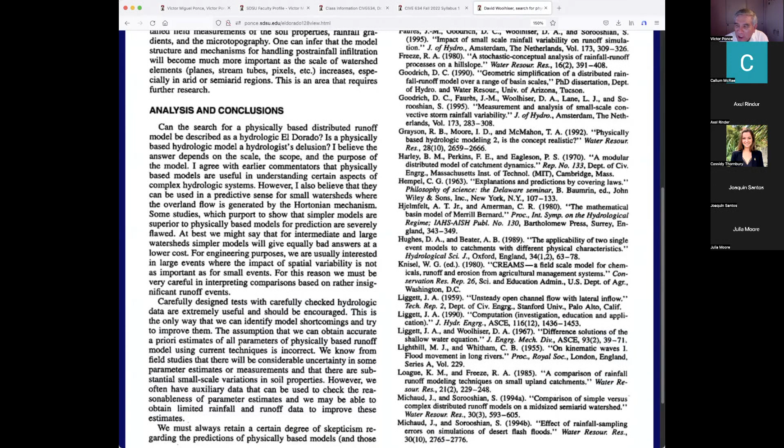Remember, this is Dave Woolhiser. He was writing this after 30 years of work in this specific field, in only one field. So we must treat his words with a lot of respect. "We must always retain a certain degree of skepticism regarding the prediction of physically based models." How about that? "And that of simpler models as well."

So he basically says the same thing for the physically based complex models, mathematical models, which I've talked about a lot today, and he also gives that criticism to the simple models. "We must remember that new labor-saving techniques to obtain watershed descriptions, such as geographic information systems, cannot improve model accuracy if the model structure is badly distorted or if it is being applied at an inappropriate scale." He talks about scale, which is important. I talked about that in my book.

And finally, let me tell you a story. I have a few minutes here. I went to Spain several times in the early 90s. Actually, Spain and Portugal are so close that I took the train and went to Portugal and visited some friends. When I was at Colorado State, I was an advisor to a couple of students. They subsequently moved to Lisbon, and I was over there visiting, and they showed me a thesis that had been put together by one of the grad students over there. It was a PhD thesis.

And the thesis was, as was normally the case, the application of GIS. Everybody was applying GIS at that time. It was the new kid on the block. Everybody wanted to try it. But the thesis was basically wrong, full of mistakes. So I had to tell them, you can't do that. Because no matter how good the tool is, if you don't know the subject, then you cannot use the tool. It's like trying to use a hammer where you can't find the wall. Good example, by the way. I know how to use a hammer, but where's the wall? Same thing here.

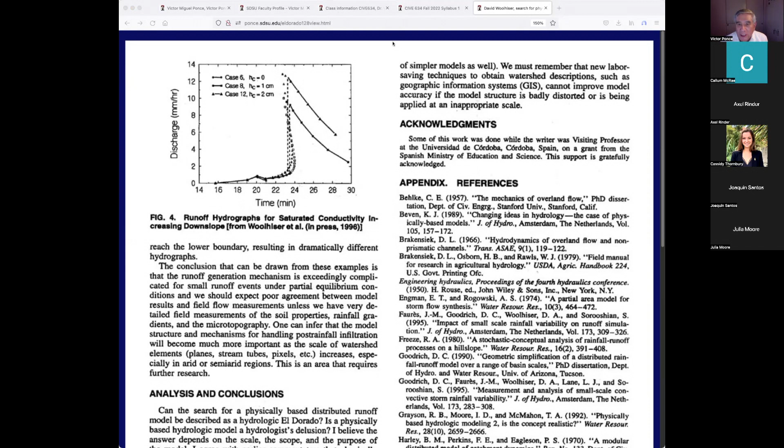So with that story, I am finishing up here. I'm going to leave the last item, which is the thesis by Aguilar. Since this subject will take more than the couple of minutes that I have, I'm going to stop there and leave it for the first thing that we do. It's only one subject. There it is. I'm only missing D13, which is diffusion wave modeling, an MS thesis by Rosa Aguilar, 2014, and then the application in the calculator.